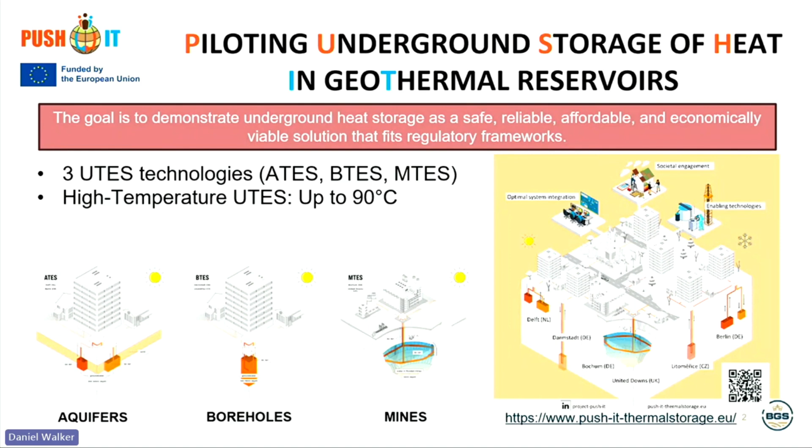Going to talk about some learnings from the project Push It. Elke and Tom explained a bit what it is yesterday. It's basically to test and learn by doing high temperature underground thermal energy storage in aquifers, boreholes, and mines. There are two mine sites, one in Bochum, which is the demonstrator, and one in United Downs, that both Elke and Tom explained yesterday. And we are looking at 4 different countries.

At BGS, we are doing the regulatory work. We are doing a review of the regulations at the sites and the countries, and we are interviewing regulators and operators to try to understand the current landscape and what things are not very well understood, clarified or specified in the different laws.

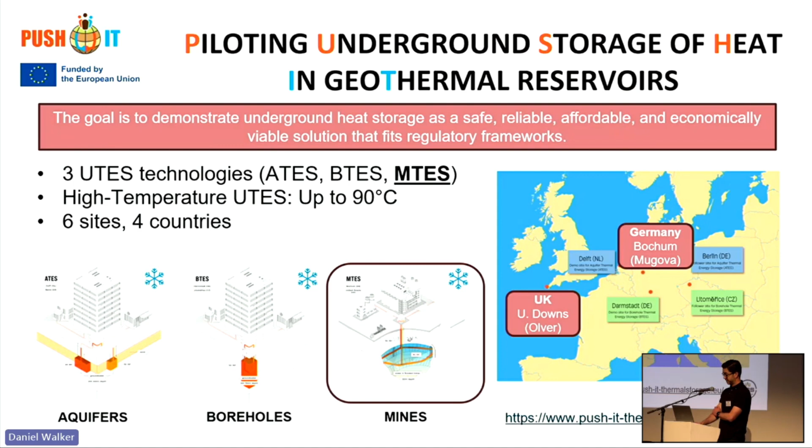Because this is a nano presentation and because something very interesting has happened in Germany recently, I'm going to focus on Germany, because it's one of the sites from which maybe we can learn some things that will be important in the future concerning thermal energy storage. So just to put you in the situation, when we started the project in Germany, this was the very basic situation in terms of geothermal energy, around 2023, 2024.

Basically, there are 2 main laws, and I'm talking about the subsurface: the Federal Mining Act and the Water Act. Anything that goes from drilling below 100 meters, you enter into the territory of the mining authority, so the mining authority controls everything that happens there. Anything related to groundwater use, groundwater testing, you have the water authority, so that requires permits.

The water authority and the mining authority are at the state level. There are 2 water authorities: the upper water authority at the state level, and a lower water authority that is usually the most related with the schemes and the permitting, usually at district level, so smaller. There is an important one, as a geologist: the Geological Data Act. We have to deposit the geological data with the Geological Survey of the state.

What I specifically want to explain here is something quite different from the situation here in the UK. The first thing is geothermal energy is a mineral resource, a natural resource, so it needs a permit to extract, to operate, from the mining authority. And the second thing is that a couple of years ago, the situation was not clear for heat storage. Basically, if you injected more heat than you extracted and the net balance was positive, a permit was not necessary, because you were not extracting heat. So it was really a gray area.

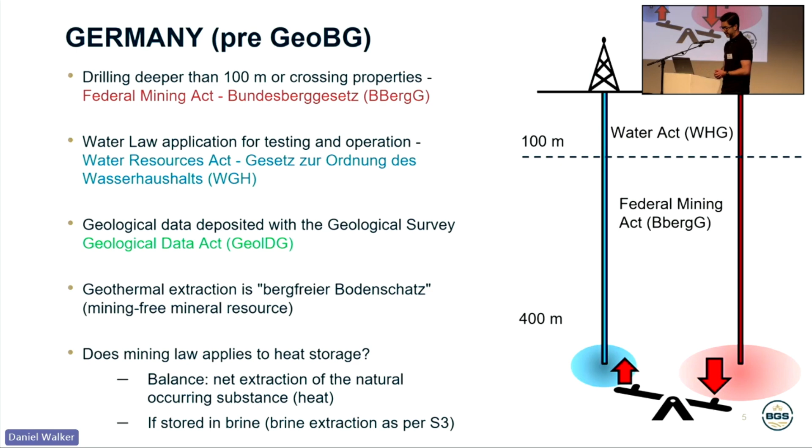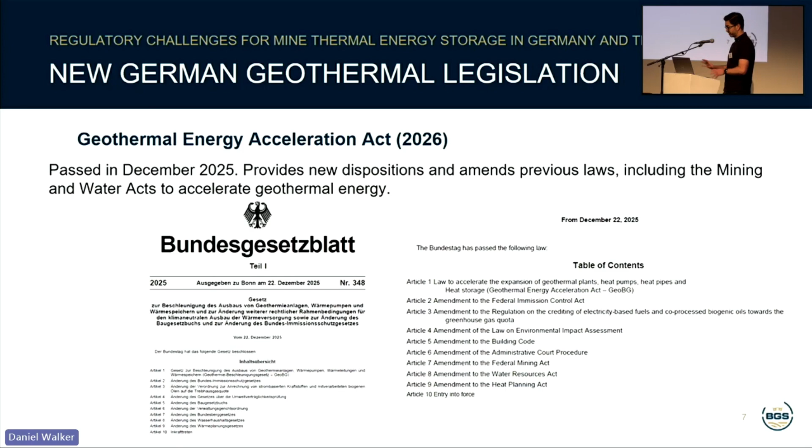So where is the interesting update? Recently, in December 2025, the Geothermal Energy Acceleration Act, that's my translation, entered into force. It provides new laws and amendments to national acts to try to accelerate the development of geothermal energy in Germany. I'm going to focus on just a few key elements, because I think they're really interesting and try to clarify all these elements just discussed.

The first thing is that underground thermal energy storage is now explicitly included at the same legal level as geothermal extraction. For example, in this section, a facility for storing heat at a depth of 400 meters or more shall be considered an underground storage facility. So you will need a mining permit, and it doesn't matter if you are using water or not.

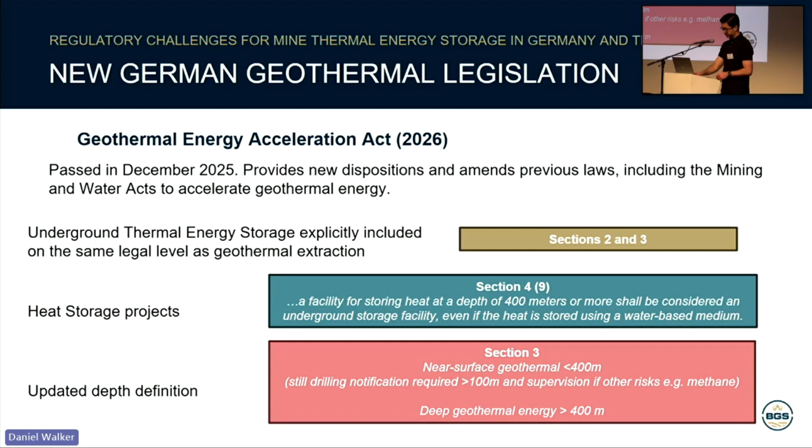The depth definition has been updated. Now it's clear that near surface geothermal is within the first 400 meters. You still need to notify the mining authority below 100 meters, but the definition of deep geothermal energy is clear: below 400 meters. That establishes a clear boundary for the application of the mining law.

Another thing that will be very important to accelerate the use of geothermal energy is that geothermal and UTES are now classified as technologies of overriding public interest. That means they get priority now, and that applies to local authorities, states, everything. If there is a geothermal project, you need to give priority and facilitate that it goes ahead.

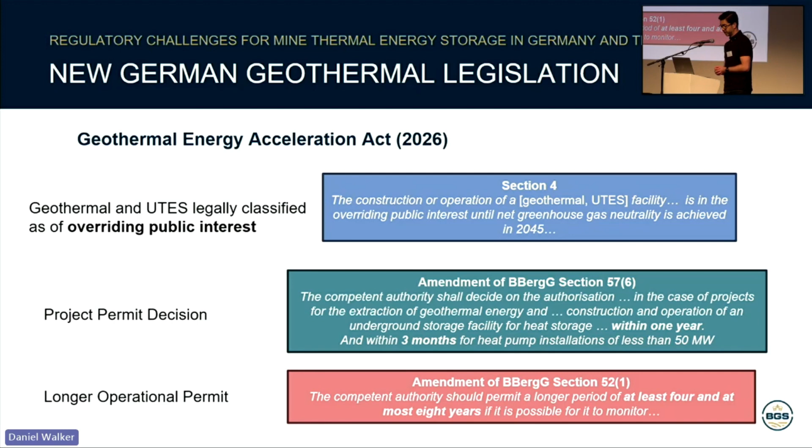There's been a decrease by law of the time limits for project permit decisions. For deep geothermal energy, that's now 1 year, and for heat pump installations, around 3 months maximum. And the operational permit based on mineral extraction, which was for about 2 years, has been extended to reduce the paperwork submitted to the mining authority. It's now a longer period, between 4 and 8 years depending on the project, which gives more room to reduce this bureaucracy.

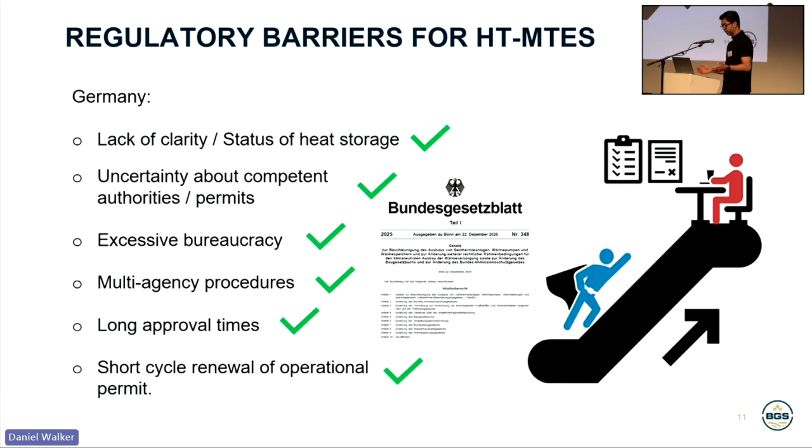So basically, this law has tried to target some of these things we've identified. It's really comprehensive, there is a lot of information there, but just to show that.